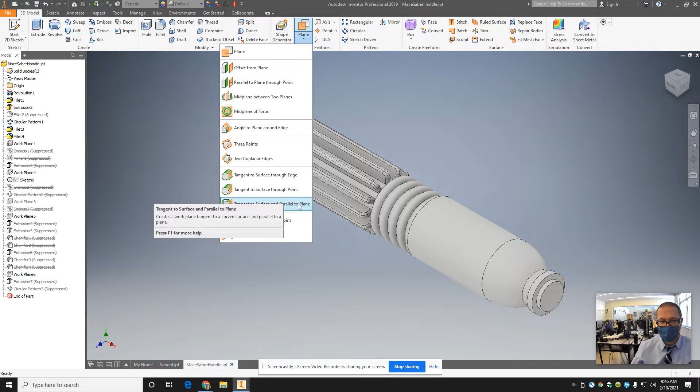It's all about doing planes tangent to surfaces and parallel to planes. So you click that option. Go to work plane, work features plane, select tangent to surface and parallel to plane.

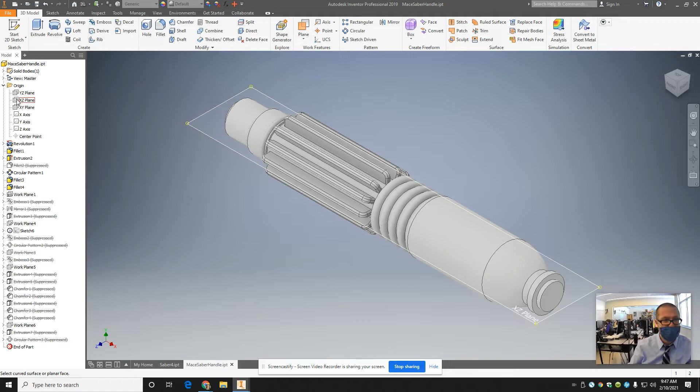Now, the order you click things in matters. You want to find the work plane you want it tangent to or parallel to first. So I'm going to put it parallel to the horizontal plane, thinking about this from doing it from the top. I could also do it from this plane, it doesn't really matter, but I'm going to do it from the XZ plane, on this surface. The reason I like to do the plane first is then you can see where it's going to put it. If you click the top of your surface, it's going to put it on top. If you click the bottom, it's going to put it on bottom.

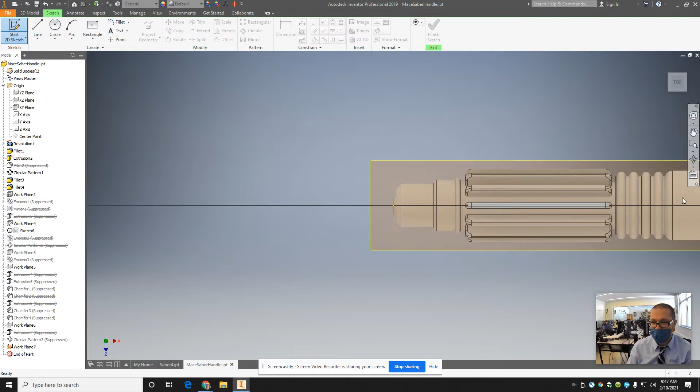There you go. Now I'm going to start a sketch on that work plane, and make a recessed panel in here. I'm going to use a center point rectangle to do this. Center point, 2-point center is nice because it'll always perfectly center your rectangle wherever you put it. So I'm just going to do this by eye, the panel I'm cutting into it.

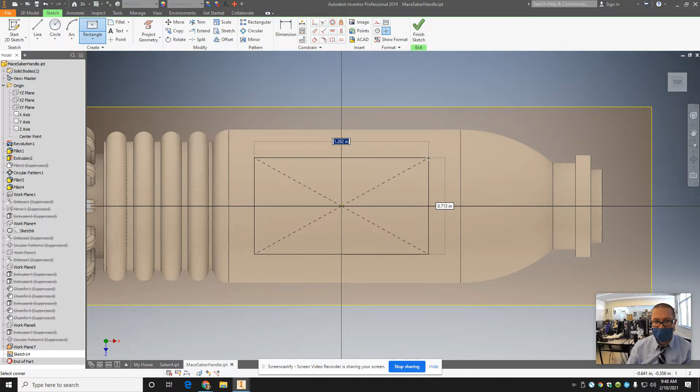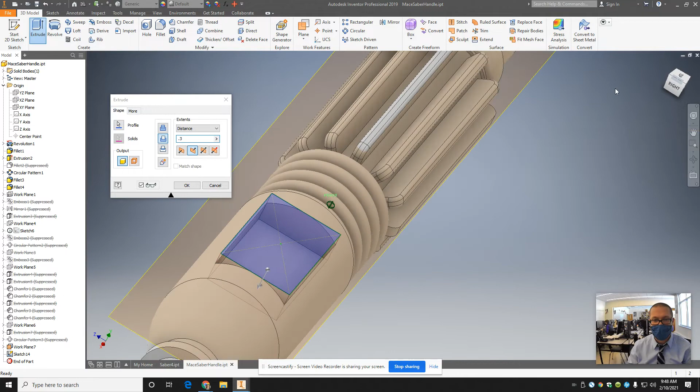Now, there's two ways you can put this panel on here, so I'm going to show you both ways. Let's just get this on there first, finish sketch. Now from here, you can either extrude it, just do a cut extrusion straight down into the model. That's obviously too far. That's probably a little too far too. Maybe that looks good. You can do just a straight cut extrusion, make it flat on the bottom, and add your buttons.

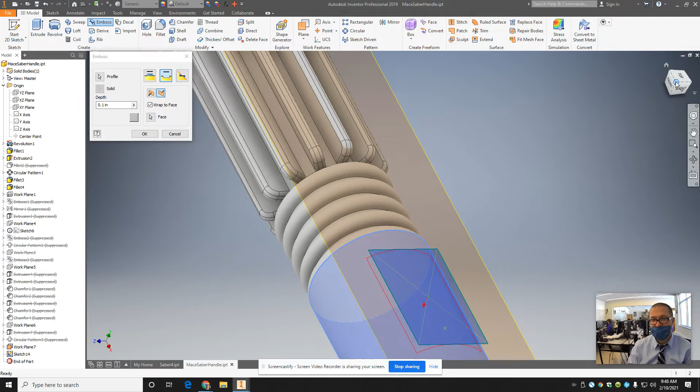Or what you can do is emboss this. If you emboss it, you do a cut, check wrap to face, and you've got to click a couple options to make sure it's going to wrap to this face, not all the way through. You can set the depth of it. What this should do is cut this rectangle out, but it'll follow the surface.

Let's see if we like that depth. I'm going to make it a little deeper, I think. Let's see what it looks like. Hit OK, see if it does it. So now what that does is it cuts it.

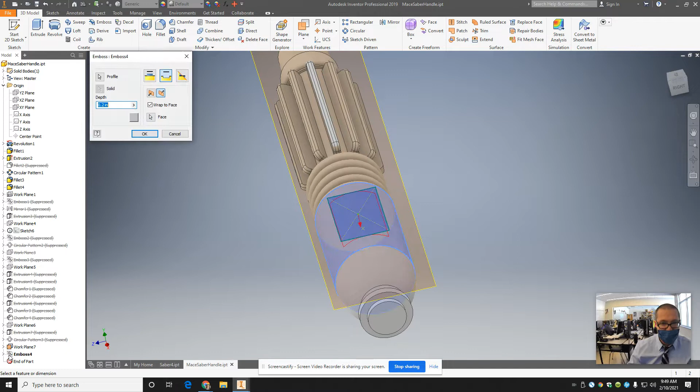Now, see how this is angled here? That's the wrap to face option. If you go back to this and uncheck wrap to face, watch the difference - it cuts the side straight down. So wrap to face makes it follow, kind of literally wraps it. If you don't have it checked, it just goes straight down. So that's a matter of preference.

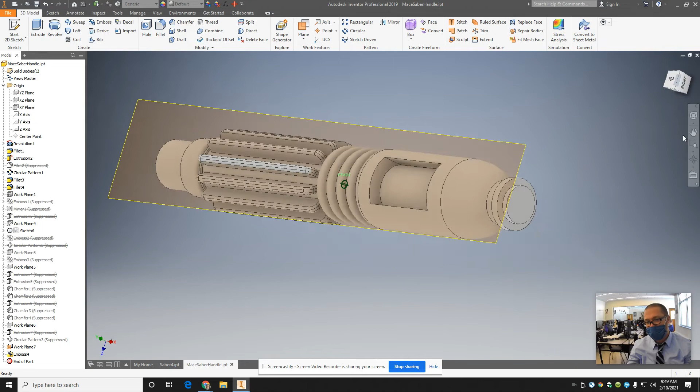Now, you could have just done the extrusion flat. Also, that does look kind of cool, right? You might think of something else you want to do with that. I don't know. So now, if you want to actually add buttons,

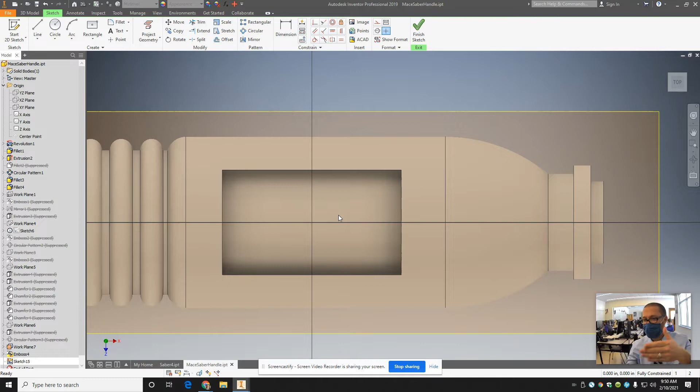you can add them from that same sketch if you want, or start another sketch on that plane. Or you add another new work plane tangent to this inside cylinder - it's kind of up to you. So if I want to make a circle button, that's not exactly where I want it.

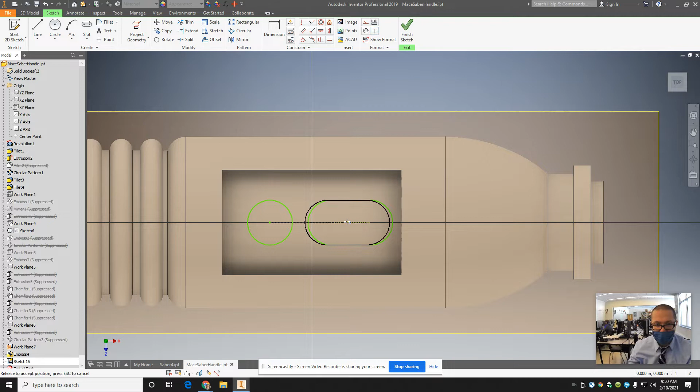All right, circle button, and then one of the shapes that's kind of fun is the slot shape, center to center. Now this one can be a little bit tricky sometimes if you can make a couple different shaped buttons if you want. Kind of fun.

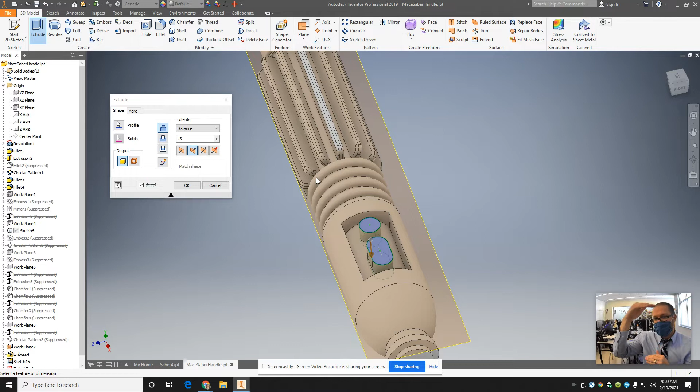For those, you can just extrude them down. Probably want the tops of those to be flat. You can extrude it down into there if you want. Looks kind of cool. If you want it to come up out of the recess a little bit, you can do what's called an asymmetric extrusion, which is this option here. You can actually make it go up out of the surface a little bit, out of that work plane.

That'll raise them up above the surface of the lightsaber a bit. So you make the work plane tangent to the surface, and then you can either emboss or just extrude. It's up to you how you want to do that.

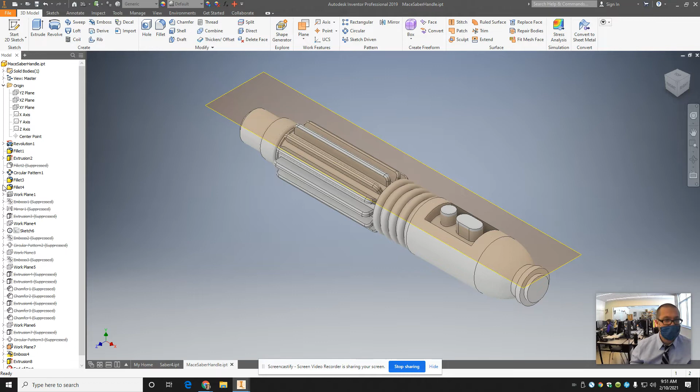And then if you want to add some, maybe you want to chamfer those buttons. That's a little much. Maybe a little more than that. And chamfer them. If you want, you can do all kinds of stuff there. I've had kids put like little ridges around it, almost like a knob to turn. I can show you how to do that as well. That's kind of fun.

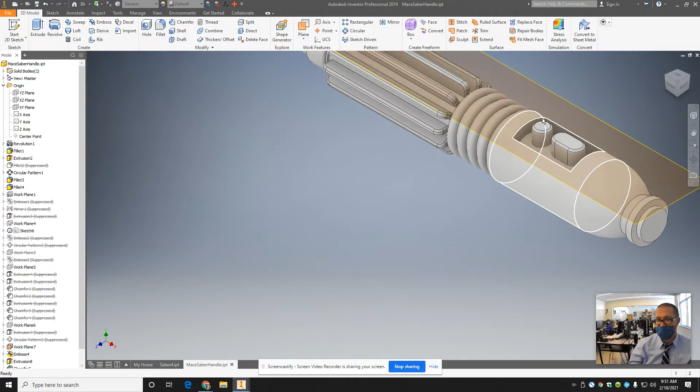You can chamfer the edge of this if you want, the opening you just made. You can start, you can get creative with that. Add details as you go.

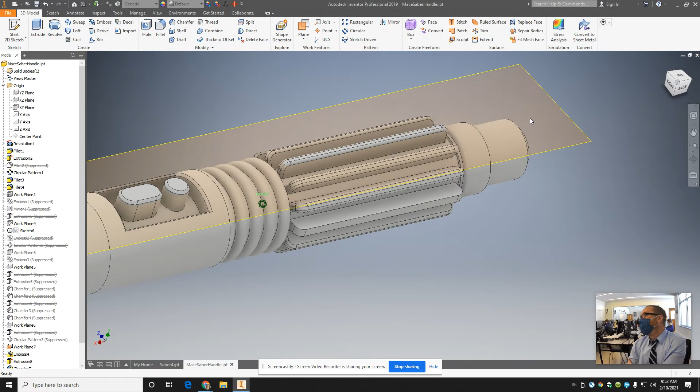And that again starts to look nice as you add asymmetry. That asymmetry starts to make it look a little more realistic, like okay, there'll be some buttons on this side. It's not just a straight up revolve thing. All of a sudden it really starts looking pretty neat as you start to add some of these features.

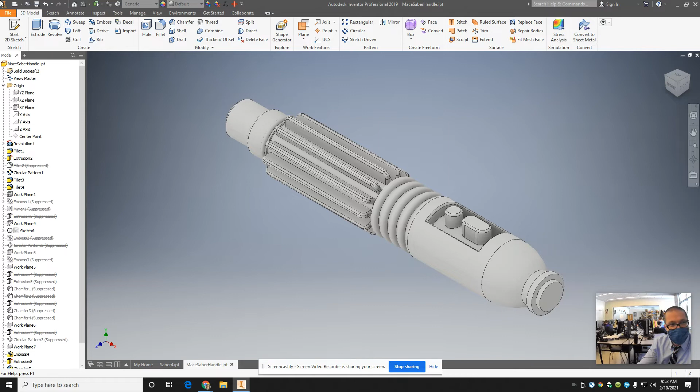On the back of this one, this lightsaber had a knob on the bottom of it. I'm not sure what the knob was exactly, but for that one, I've put a work plane on here.

Plane, tangent to surface, parallel to plane, so tangent to this surface, parallel to this plane. I want to put it on the perpendicular side to this one, right? That'll make it look cool too. So that, again, that asymmetry makes these look interesting.

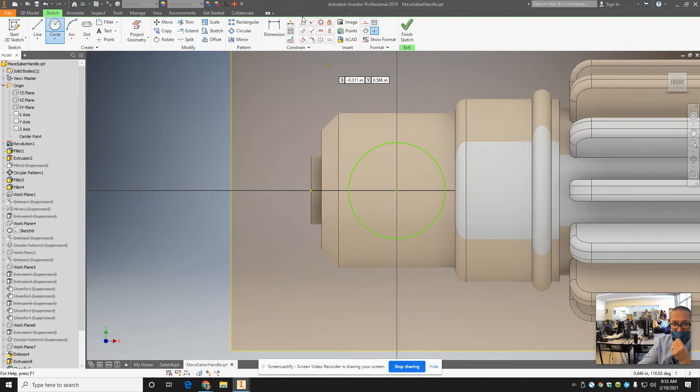I'm going to start a sketch on this work plane. What did I do? What I did was I made a hole through it, the bottom of it. It was a knob and a hole when I made it for my son. So I think what I did was, first thing I did is I just put a knob on it, right?

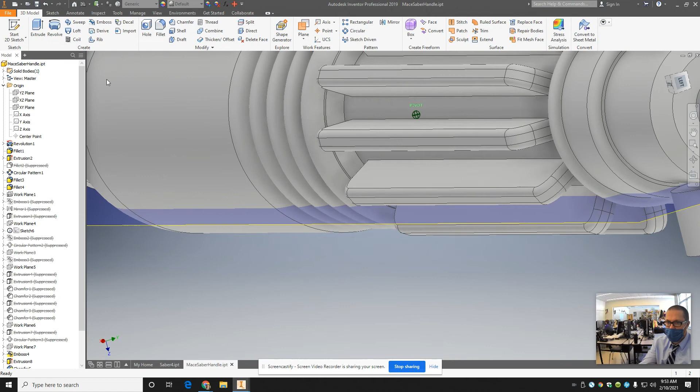And again, when you extrude this on the surface, you got to make sure you do an asymmetric extrusion here, so it actually—because right now, if I just hit OK, that cylinder I just made is just sitting tangent to that surface. It's not going to be actually attached, right? If you zoom in there, you can see it's not actually attached. So I got to make sure when I do that extrusion for that knob, I make it an asymmetric extrusion so it goes down into the model as well. And look, that puts material in between that gap there to make it solid.

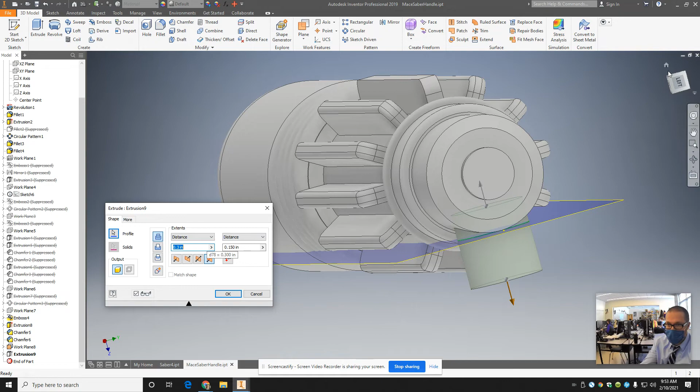Now, it's going up a little too high, if you ask me. So let's see, this side of the asymmetric extrusion, let's see, 0.1, maybe a little bigger, 0.15. Okay. Yeah, that's cool. I like that.

What else did I do with this that one time? You know what I did? Chamfered it.

Okay, I'm going to start a sketch here. Put a point right on the middle of it. Put a hole all the way through. Oh boy, way too big.

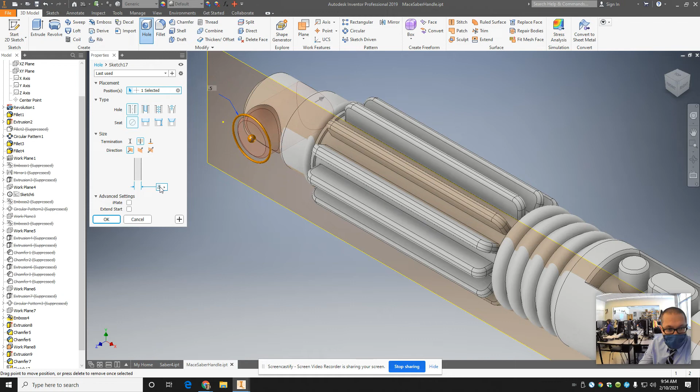So let's see, 0.01—oops, no, I'm messing this all up. 0.1, that's a little small. 0.2, yeah, it looks cool.

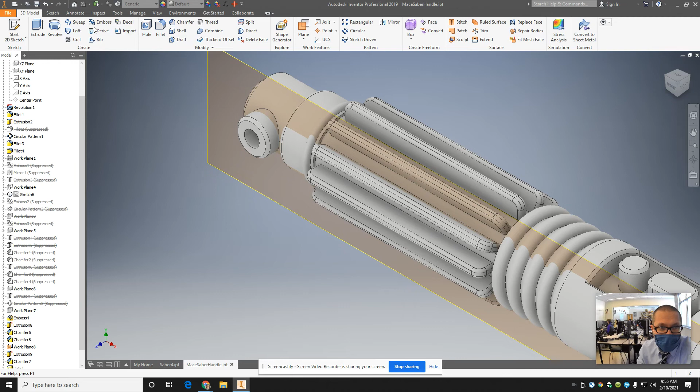Okay, I'm going to chamfer this, inside of that hole. Fly over to the other side, chamfer this hole. That way you could put like a string or something on it, or a leather strap or something hanging off. So it's starting to come together.

Those work planes tangent to the surface is the key. I guess I better do something up here, right? Put a hole in there or something. Remember, you can just use a circle too—it doesn't need to be a hole for this one. It doesn't really matter, right? Make a cut. Looks kind of cool if you recess it and you get that nice shadow.

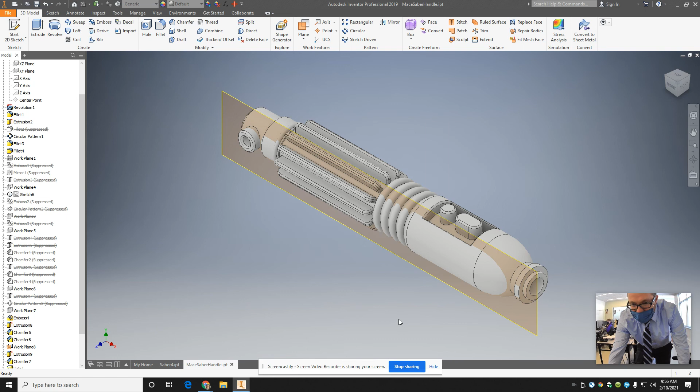You get a shadow in there. Looks a little more interesting. You could customize it with writing if you wanted to. You can emboss writing. Embossing will work on this lightsaber nicely because most of the shapes are cylindrical or pretty basic, so embossing will work.